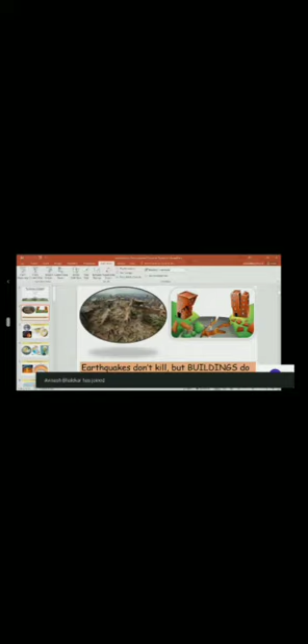Basically, we are earthquake engineers. Earthquake engineering is an offshoot of civil engineering where we deal with loads which are dynamic, which vary with time. As earthquake engineers, our motto, our tagline, is 'earthquakes don't kill, but buildings do.' It's an earthquake that doesn't cause any death, but it's improperly engineered buildings which cause all that devastation. That's the tagline of earthquake engineers.

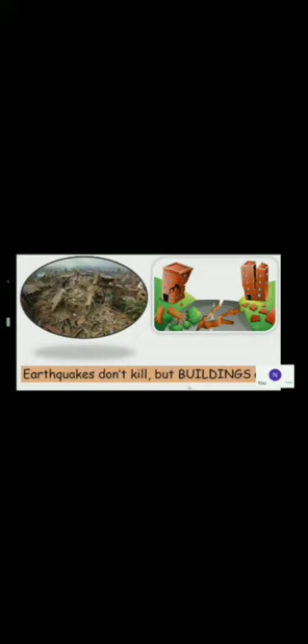Now I want to present some important terminology. We have a subject called seismology. Seismology is a branch of science which deals with the internal structure of the earth, as well as the origin, propagation, and penetration of seismic waves across various strata of the earth. Earthquake engineering comes into play when the seismic waves hit the ground, and we model or design the building so as to limit the devastation caused by the earthquake.

Now let's delve into the structure of the earth. This is the globe, and when we cut open the body of the earth, we find that it is composed of different layers: core, crust, and mantle. The core is further divided into inner core and outer core, and the mantle is divided into lower mantle and upper mantle, as well as the crust. So these are the various strata of the earth.

Why do we have to study all these strata? Because to understand the propagation of seismic waves across various layers of the earth, we have to know what the earth is composed of and what its layers are. The inner core and outer core differ in that the outer core is basically molten, while the mantle and crust are solid forms. That makes a lot of difference in the propagation of seismic waves across the body of the earth.

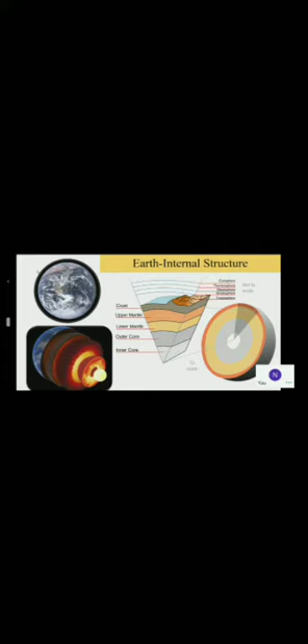So there comes the importance of seismology again, a science that deals with the internal structure of the earth, and the origin and propagation of seismic waves. We have the globe, the earth in its present form, shown at the left corner of the slide. This is the earth in its present form.

But how was the earth the same millions of years ago? No. The origin of earthquakes, or the very existence of earthquakes, is related to the collision, or to the movement of continents between themselves. This theory is summed up as the continental drift theory. Millions of years ago, the entire landmass of earth was accumulated into a mass called Gondwana land.

I'm sorry, I'm getting a request again. Okay.

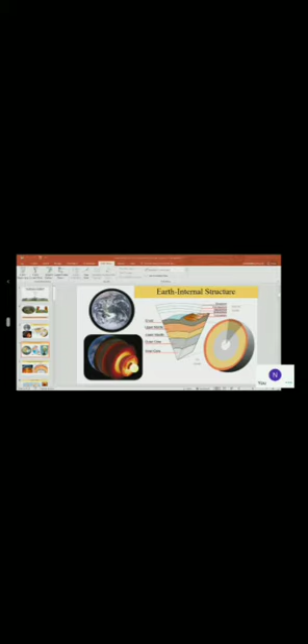Yeah, so the entire landmass of the earth is concentrated into a small mass called Gondwana land.

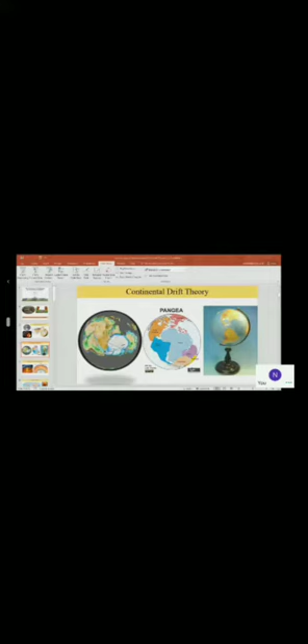The continents of Gondwana land started drifting from each other and formed what is known as Pangaea. Pangaea is a form of the earth that existed 200 million years ago in the late Triassic era. From Gondwana land we have Pangaea, and from Pangaea the continents further drifted apart, giving us the present form of earth shown on the right corner of the slide.

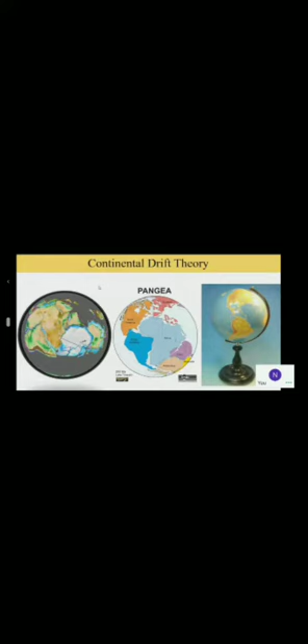Why do these continents drift apart from each other? We have basically three modes of energy transfer: conduction, radiation, and convection. As mentioned, the mantle and outer core of the earth is molten, while the crust and inner core are rigid. Because of this molten nature, convection currents develop in the mantle, and these currents either push the crust apart or pull it apart. So because of that push and pull, the continents move either towards each other or keep moving away from each other. That is the basis of continental drift, and that is why continents keep drifting apart.

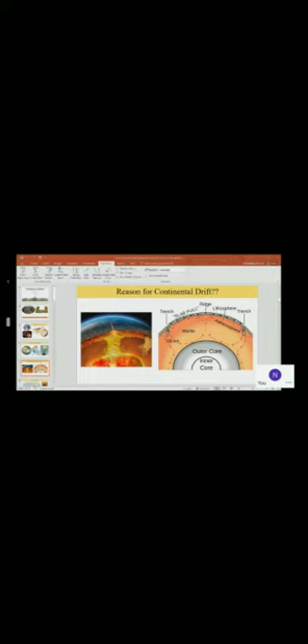On the left is a visualization of how continental drift takes place, and on the right hand side is a schematic representation of the convective current that is formed.

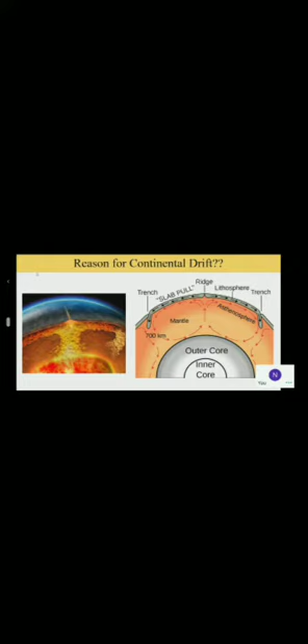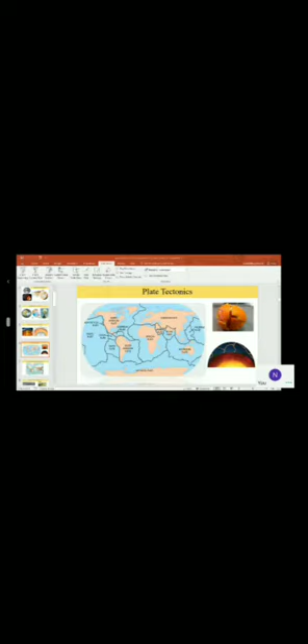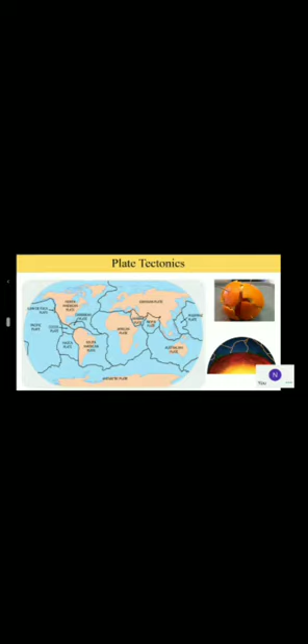The Earth is composed of a lot of fragments, like we see with the orange on the right - the orange peel is separated from the orange mass. Similarly, this crustal mass is called the lithosphere. The crust and the upper mantle are collectively called the lithosphere, which floats on the molten mantle mass. Because of that, we have all these plates: Pacific plate, North American plate, South American plate, Indian plate, and the Eurasian plate. The plate of our concern is the Indian plate because it is subducting, moving under the Eurasian plate. That is the reason for earthquakes basically in India.

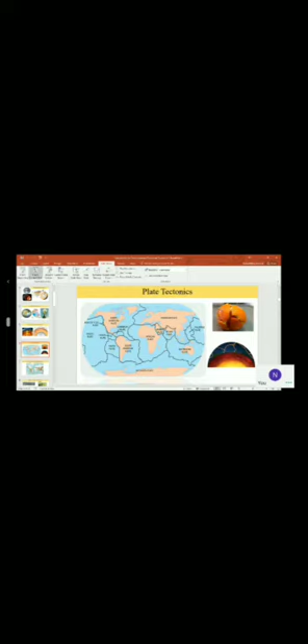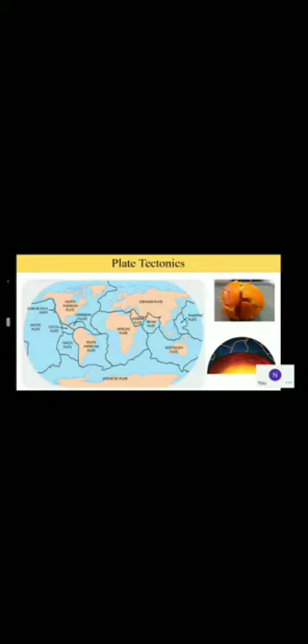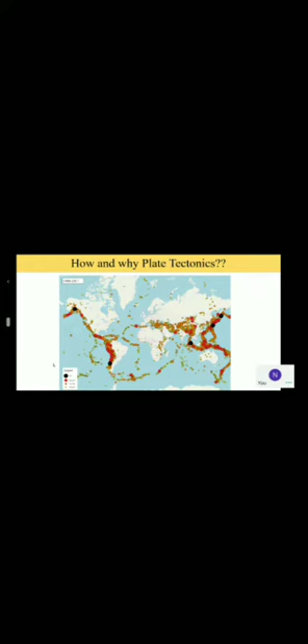Now we have tectonic plates - how do these tectonic plates interact with each other? We have three types of interaction: convergent boundary, divergent boundary, and transform boundary. Convergent boundary is a destructive boundary because the crustal mass is eaten up, and one tectonic plate sinks below the other.

So it destructs some crust. Divergent boundary is where the masses drift apart from each other, and we have a new crustal mass that is formed. That is what is called a divergent boundary. And transform boundary is a boundary where a slip occurs between the plate tectonics.

These may not be important from a civil engineering point of view, but all these interactions and all the waves, seismic waves, and all those seismological parameters are very much required when we design for earthquake resistance, when we incorporate seismic resistance into buildings. So seismology plays a vital role there, and that is why we have to be clear of all these things.

Now, why does earthquake occur? If we define an earthquake as a sudden rupture of Earth's mass beneath the ground, what we see is that over time, the tectonic plates on the Earth accumulate a lot of strain energy.

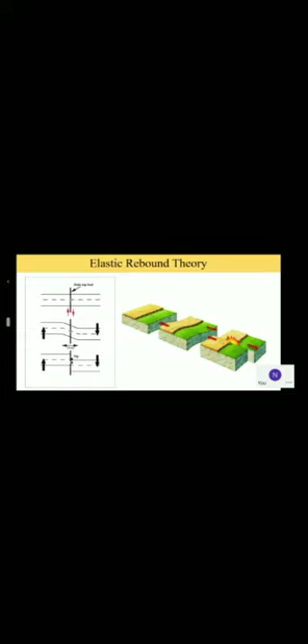We have a fence here, and there are stresses acting on this block, and the fence changes its shape, and because of the pressure, before the movement of plate tectonics, there is a sudden release of energy that occurs, and because of that the energy is released with a very huge magnitude, and we call that earthquakes. You can see a blast here.

So this is how an earthquake occurs, because of elastic... this theory is called elastic rebound theory, where the elastic strain energy stored is released suddenly.

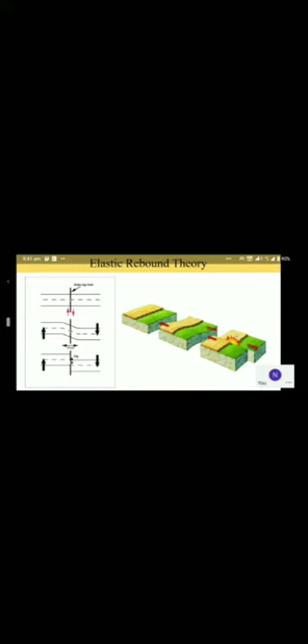Now we'll talk about some terminology of an earthquake. This is the focus. Focus is the point beneath the earth where the rupture basically occurs. You can see in this figure there is a rupture occurring, in between the plate tectonics, or a collision of plate tectonics you can say. That point is called focus.

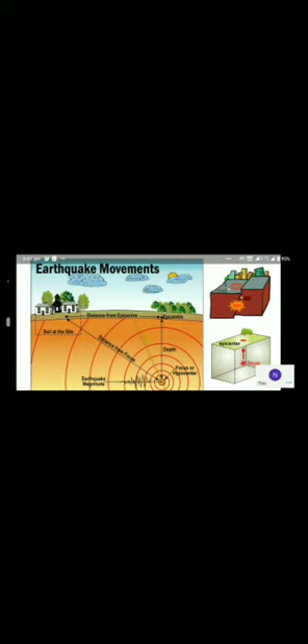And the point exactly above the focus on the ground is what we call the epicenter. So if we follow media reports, we could find that an earthquake of a particular magnitude occurred at the epicenter. So basically, the epicenter is the point where the maximum impact of an earthquake is felt. Any questions still here?

Okay, I guess there are no questions.

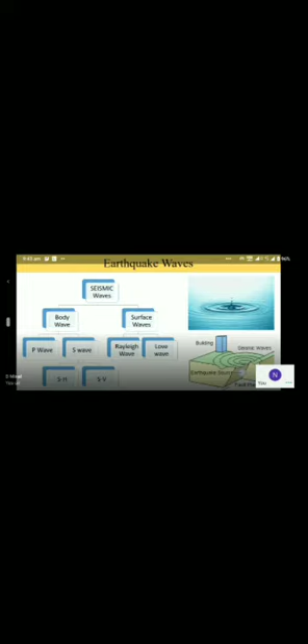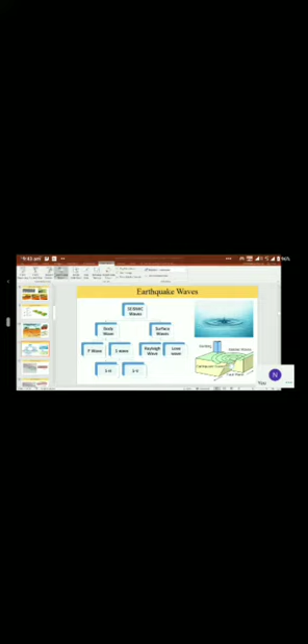So what we have here is a ripple. A stone falls on the surface of water, and there are ripples that are formed, and the stone drops down also, through the body of water. So the waves that develop downwards in the direction of movement of the stone are called body waves, and the ripples seen on the surface of water are called surface waves. That is the basic difference between a body wave and a surface wave.

I guess my slides are not yet visible.

Okay, so this is body wave. Body wave is basically the wave that travels through the body of the earth, through the mass of the earth, and surface waves are produced on the surface of the earth. So we can classify body wave into P wave and S wave, and surface wave we can classify as Rayleigh wave and Love wave.

If you see this figure also, this is the earthquake source, and from source to the top, the waves travel through the body of the earth, and that is why it is called the body wave. And when it reaches the surface, or when it is about to reach the surface, there are waves in the form of ripples that are formed.

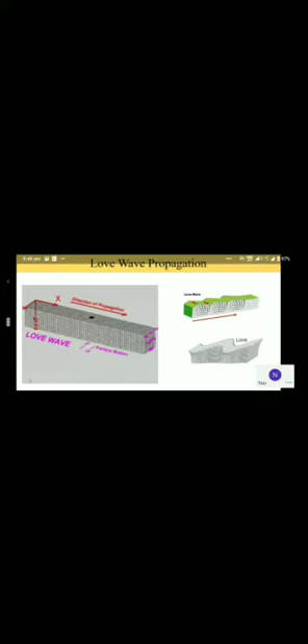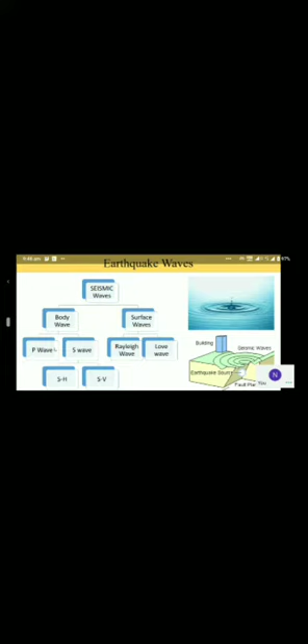We could use this reaction time between the P wave arrival and S wave arrival for giving warnings. Some instruments can record P waves, and whenever the instrument records them, we can sound a warning so people can evacuate to safe places before the S wave actually hits, because S wave is more dangerous than P waves. P waves will not harm us, right?

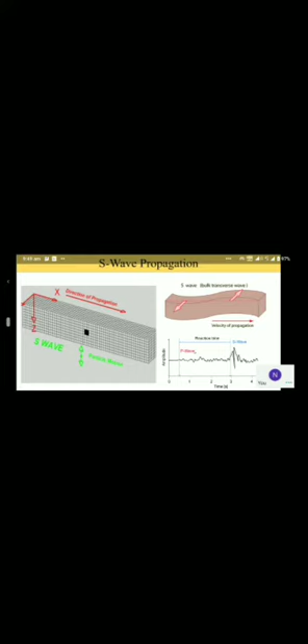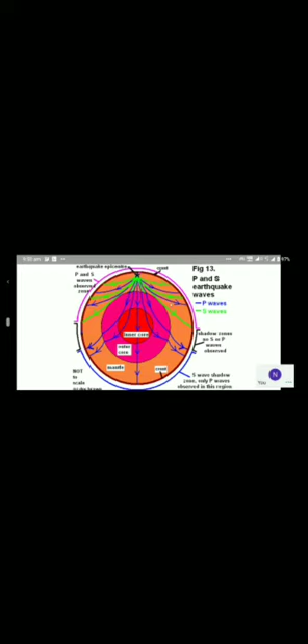Now, coming to how to measure an earthquake: the instrument we use is called the seismograph. A seismograph is an instrument that works on the principle of inertia, as most of us would be familiar with. So the seismograph is an instrument used for measuring an earthquake.

So what we have here is a setup with a very heavy, fixed mass. When an earthquake hits, the bottom plate moves and the entire setup moves, but the heavy mass, because of inertia, stays in its position. Because of this staying in place, it can sketch the signature of an earthquake on paper. This entire instrument is called the seismograph.

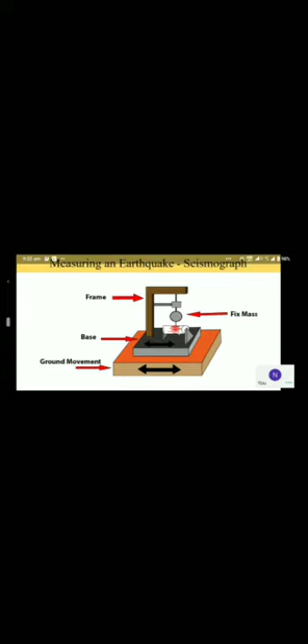Now coming to the seismogram. This paper is the record of the earthquake, and if we unfold it, this seismograph record is called a seismogram - the signature of the earth that we obtain. If we unfurl it, we get this profile, where the amplitude is the maximum displacement the earthquake is causing.

Initially we have a very low amplitude. If you can see, the P wave here has very low amplitude, while the S wave has a much higher amplitude, and it keeps on increasing. So we can see that body waves are less damaging from an amplitude point of view as well.

First, body waves cause only vertical movement, and vertical movements are not as dangerous for buildings because we already consider factor of safety for columns, beams, and slabs for vertical loads. But for horizontal loads, we do not consider the same factor of safety. Surface waves also cause horizontal movement, so surface waves are indeed dangerous. Also, surface waves have a larger amplitude compared to body waves - that is an important point.

So that is about the basics of seismology. Now, I would like to make a point here.

The frequent earthquakes in the Delhi region are being much discussed now. So as seismologists and earthquake engineers, do we really have to be concerned about the recent seismic activity in Delhi? I would say no, because the Delhi region has been experiencing seismic activity for a long time, and none of the recent earthquakes have had a magnitude greater than 4. Earthquakes of magnitude less than 4 occur very frequently and do not cause any real harm. Also, because of the coronavirus lockdown, it is more perceived by people, and that's why people are more scared of it. So regarding Delhi seismicity and North Indian seismicity in 2020, there is nothing to worry about.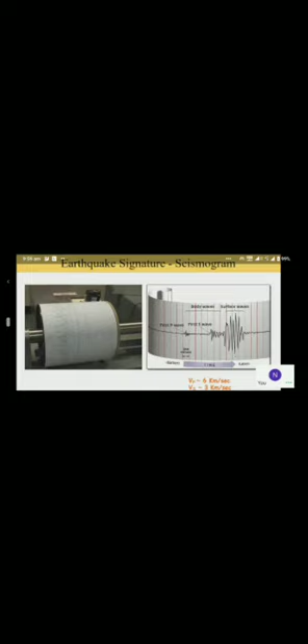Okay, so that is the earthquake signature we have. This earthquake signature is the most relevant link between seismology and earthquake engineering, because the maximum amplitude from this signature is extracted to calculate the earthquake magnitude, which is of very much importance to civil engineers and earthquake engineers.

Now let's slowly shift from seismology to structural dynamics. So we all hit the gym. If we hold the dumbbells in that fashion, the dumbbell is hitting us vertically, and the load is not changing with time, right? That is fixed, so that loading is called static loading.

And when we lift up the dumbbell, or do some exercise with it, we are imparting some dynamic loading into our arms. Because the load is varying with time, anything that varies with time, whether the magnitude, direction, or position of the load, we call it dynamic loading, else we call it static loading.

As civil engineers, we would be more interested in doing a static analysis, until and unless we consider earthquake loading. We design buildings for static loads, not dynamic load. But if we shift from basic civil engineering to earthquake resistant design, we incorporate dynamic loads on the buildings, and dynamic loads could be because of earthquake, wind, tsunami, or other reasons as well.

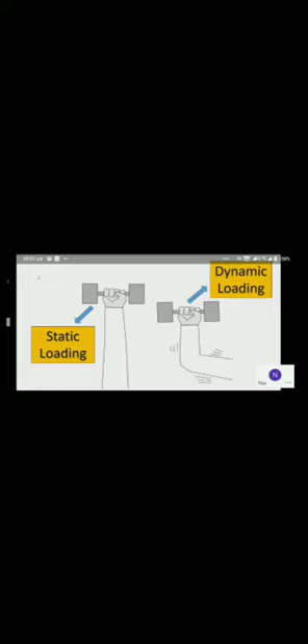So this is the basics of static and dynamic loading. A static load is a load which is not time dependent, meaning it does not vary with time. If we plot force with respect to time, we find that a static load remains constant throughout. When time changes, there is no variation in the load; the load remains constant. So that is mathematically what a static load is.

Coming to dynamic load, it is a load which varies with time. Dynamic loading can be divided into periodic and non-periodic loading. Periodic loading is a type of loading which repeats itself after a fixed time interval, so the load repeats itself over this interval - this is called periodic loading. Non-periodic means there is no fixed period - for example, impact loading like a bomb blast, or earthquake loading, which is also non-periodic.

Now how do we define a dynamic load? Any load whose direction, magnitude, or position vector varies with time - that load becomes a dynamic load.

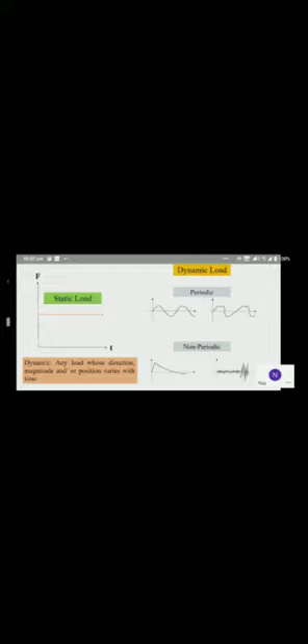Now, I guess a lot of civil engineers here would be interested in degrees of freedom, and they would be very much well aware of that. Well, if we have - I'm sorry, I'm getting another admit request.

Coming to degrees of freedom, how do we define it? Degrees of freedom is basically defined as the number of displacement components to be considered in order to represent the effects of all the significant forces.

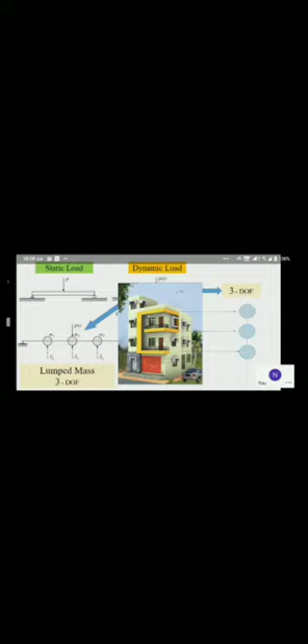To analyze a three-story building seismically, we apply this procedure. If it's a 4-story building, there'll be a 4 degree of freedom system. If it's a 5-story building, there'll be 5 degree of freedom system, and so on. But infinite degrees of freedom is not acceptable, so we similarly lump masses and convert into a 3 degree of freedom system.

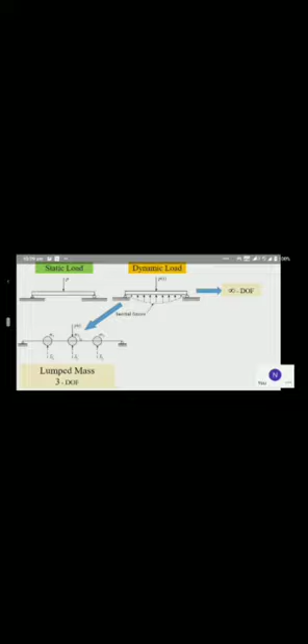Now, everybody of us would be aware of what an inertia is. I'm sorry, I got an admit request again. Okay, okay.

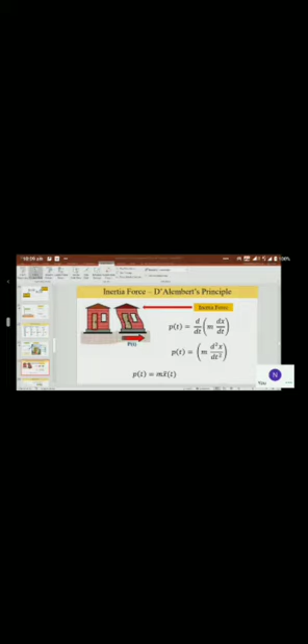Inertia is the tendency of a body to remain in a state of rest or of uniform motion. So when a building is subjected to earthquake loading, the building tends to remain in its equilibrium position as before because of its inertia. You can see that the top of the building sways left while the bottom of the building has to move right because of the earthquake loading.

What the principle of inertia teaches us, and the D'Alembert principle says, is that the time dependent external load is equal to the rate of change of momentum. The external load acts from left to right, and this inertial load acts in the opposite direction, so these are equal in magnitude. D'Alembert's principle says that the magnitude of the time varying force is equal to the rate of change of momentum.

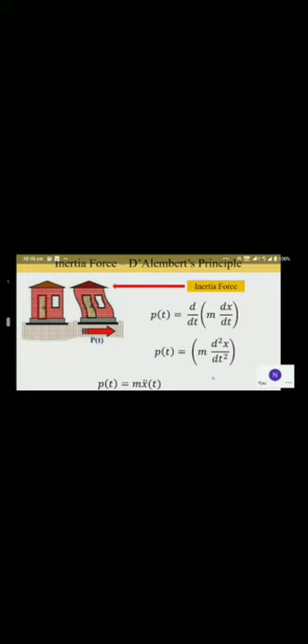If we simplify this, we find that the external loading is equal to mass times the acceleration. Acceleration is again time dependent, so it is mass times the acceleration of the body. This is called the inertial force. This equation is of importance when we are solving dynamic problems. So this is the inertia force.

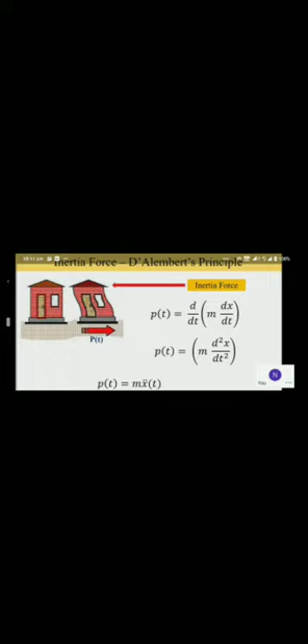Now, damping force. Damping is basically a loss of energy. Like we run bikes, we drive cars, so all those have dampers attached. Bikes have shock absorbers, trucks have leaf springs, and cars have suspensions. The effect of all those is to generate a loss of energy and help reduce the vibrations, so we can travel in a safe mode. That is the significance of damping.

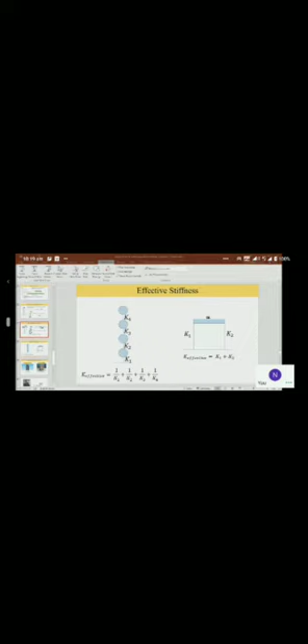Yes, Vijay Kumar sir, hello sir. Sir, in the damping force graph, you showed an initial amplitude, but the structure initially is at rest. How did you get that initial amplitude? Which one, sir? Just a second.

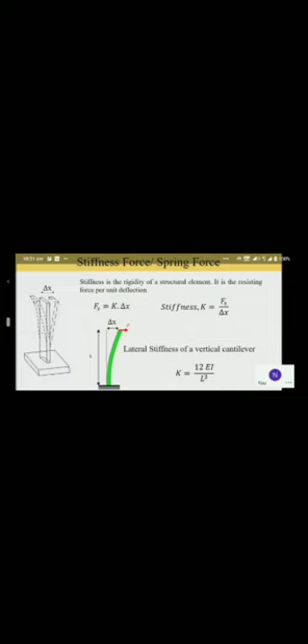So at 4 seconds, say the amplitude is this much. At 5 seconds the amplitude has decreased, and at 6 seconds the amplitude is going on decreasing. Even at time 0, there could be an initial amplitude, because amplitude means you're moving. For example, you take this vertical cantilever and pull it towards your left, incorporating a strain, delta x strain. Because of this, there is a predefined amplitude. So after that, because of this damper, the amplitude keeps on decreasing.

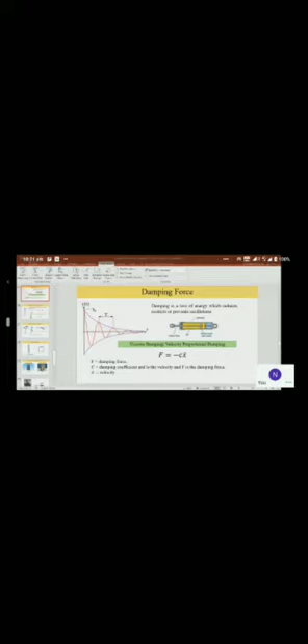So we have all these forces: inertia force, damping force, stiffness force, and we derived the basic dynamic equation for free and forced vibrations as well. Now, here's a question to the audience.

Now we have a 20-story building and a 4-story building. On my left side is a building of 20 stories, and on my right side is a building of only 4 stories. Say a hypothetical earthquake occurs affecting both the 20-story building and the 4-story building. So which building would shake more, the 20-story building or the 4-story building? That's an open question to the audience.

So according to the audience, which building is expected to shake more? Can anybody comment, or put in the chat, the 20-story or the 4-story building? Yes, Vijay Kumar says 4-story, Bharti Misal says 4-story. Okay, so basically, according to them, 4-story buildings shake more.

What do you mean? Okay, so Vijay Kumar and Bharti say 4-story buildings shake more during an earthquake. What we see here is that it's not that deterministic. We cannot say for sure that a 4-story building shakes more or a 20-story building shakes more, because every building has its own time period.

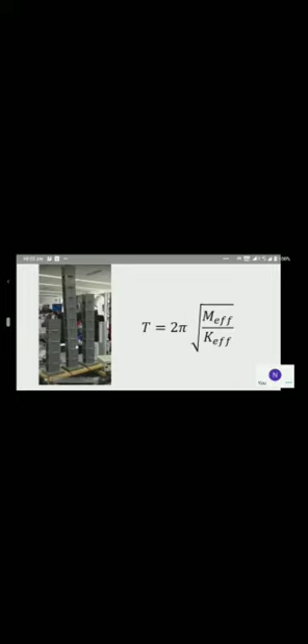A tall building is supposed to face more damage, but that is not the case, because the damage is basically caused by resonance, and that depends on the natural time period of the building. If the natural time period of the building matches with the time period of the earthquake, then there is a resonance condition, and there will be maximum shaking.

So this is an equation for the time period: 2 pi root of mass effective by stiffness effective. If I play this video, we can just observe the central building and the other two building frames.

So yeah, the earthquake... I guess there is some glitch. Okay, I guess somebody else is presenting. Okay, yeah, right.

Now just observe the central building and the buildings surrounding that. If I play this video, we see that now the tall building is shaking more.

Now just observe the tall building. The tall building is shaking more now, initially, because the time period of the tall building is high. So initially we are shaking the ground only slowly, meaning a higher time period. That higher time period matches with the resonating time period, or natural time period, of this tall building, and that is why the tall building is moving vigorously initially.

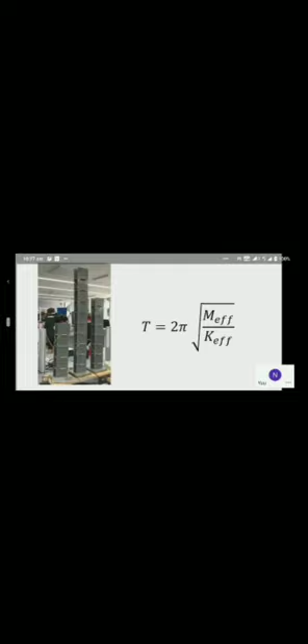So, I'll play that again. The taller building is moving vigorously, but the shorter buildings are not. But when I increase the frequency of ground vibration, that frequency matches with the frequency of the short buildings, and the short buildings start vibrating vigorously compared to the tall building.

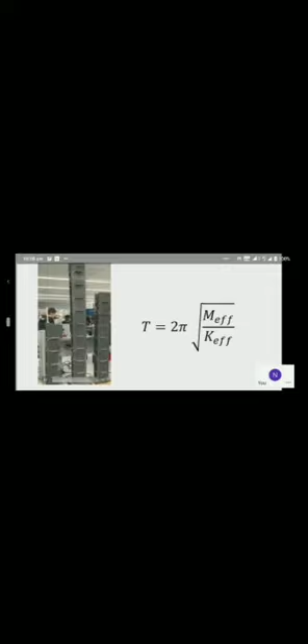So coming to the answer to the question, let me admit somebody. Now, which building would shake more? The answer is the earthquake has to decide which building it has to shake more, either the 20-story building or the 4-story building. Everything is a play of the natural frequencies and natural time period.

So in the 1960 Chile earthquake, what happened was all those buildings with 21 stories got damaged. All other buildings were not damaged. That is because the natural time period of the building matched with the time period, or frequency, of the earthquake.

So only the 21-story buildings were in resonance, other buildings were not in resonance, and only the 21-story buildings were damaged in the 1960 Chile earthquake. That was the thing. This is the equation for the time period of a building: 2 pi root of mass effective by K effective.

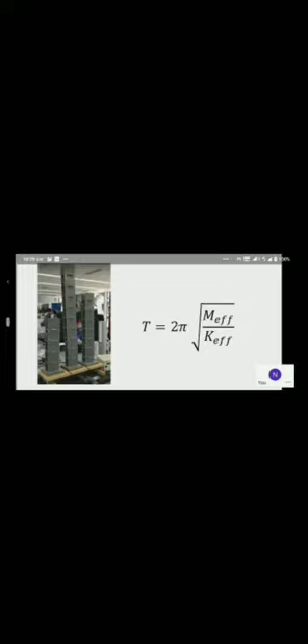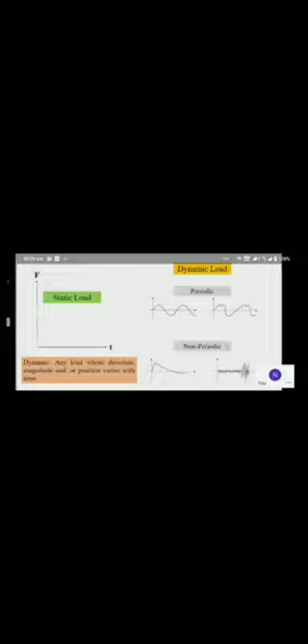Now if you calculate, we get the time period of the building as 0.45 seconds. So this would be around a 4-story building or something similar, since the entire mass is lumped here.

So how do we calculate the time period? We use this formula: 2 pi root of m effective by K effective. We get 0.45 seconds here.

Now, what is of paramount importance to earthquake engineers is the estimation of base shear. Base shear is the maximum expected lateral force the building is subjected to during an earthquake event - the maximum horizontal force. For example, all those individual stories from first story till 10th story are subjected to seismic loads, and that is increasing. The highest story will have the highest seismic loading, or expected lateral force.

If we take a sum of all these lateral forces, we get something called base shear. Base shear is the sum of all these lateral forces. Now, once we get the time period of the building, we can calculate the total base shear. I'll show you how.

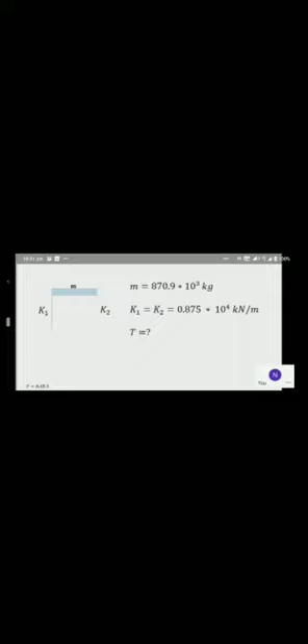After we get the total base shear of a building, we have to distribute it into various individual members. So F1, part of the entire base shear, has to be transferred to this member, this member, and this member. The horizontal loading is now incorporated, and we can design our members for these horizontal loads, using equations available in IS codes, maybe 1893.

Now, this is the building we have taken, with a time period of 0.45 seconds. This building is located at Pune, and it's a special moment resisting frame, a residential building. Now we have to calculate the base shear.

Now we see that the time period of this building is 0.45 seconds, and it's located at Pune. I'm sorry, I did not add the seismic zoning map - let me talk about Pune a bit. India is basically zoned into 5 seismic zones.

Zone 1, zone 2, zone 3 - actually India is now zoned into 4 seismic zones: zone 2, zone 3, zone 4, and zone 5. Earlier there were 5 zones, and zone 1 was considered least earthquake prone, but there were some earthquakes in zone 1 as well. So in the later modification of IS 1893, zone 1 was merged with zone 2. Now we have zone 2, zone 3, zone 4, and zone 5.

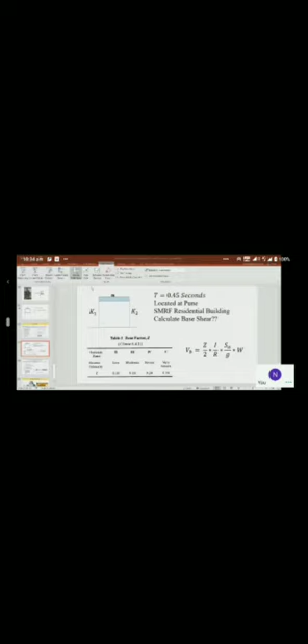So for Pune, we have Z as 0.24. So to calculate for this building in Pune, we use Z as 0.24. Now, I is the importance factor.

Now again, if you go for this one, IS code, coming to the importance factor, table number 6, we have: if it's a hospital building, school building, or a public building, we have an importance factor of 1.5. But this being a residential building, the importance factor for this building is only 1.0.

Now coming to the response reduction factor. I have mentioned that this is a special moment resisting frame. What is a special moment resisting frame? It is a frame which is developed by adopting all ductile detailing provisions as per IS code 13920. If we do all those ductile detailing for that building's members, then we call that building a special moment resisting frame.

So for an SMRF building, if we take IS code table number 7, we find that for a special moment resisting frame, we can take a response reduction factor R of 5.0.

So in this equation, Z we put as 0.24 because this is in Pune, zone 4, and importance factor of 1 because this is a residential building, and R is the response reduction factor, we take it as 5. And SA by G is something we get from a chart.

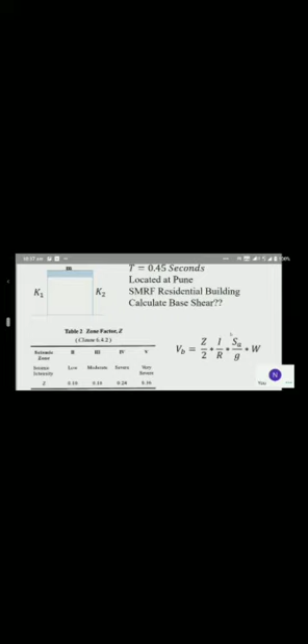Now if I take the SA by G value from the chart, I get it as 2.5. Coming to the entire equation, up to SA by G, this base shear equation is dimensionless. We multiply this dimensionless equation with the seismic weight here. Now Z by 2, into I by R, into SA by G, into the seismic weight. So we get the base shear for this building as 5.327 kilonewton.

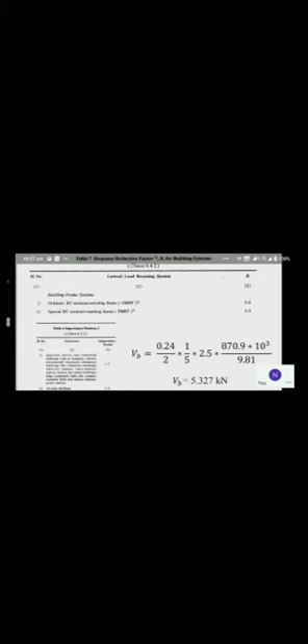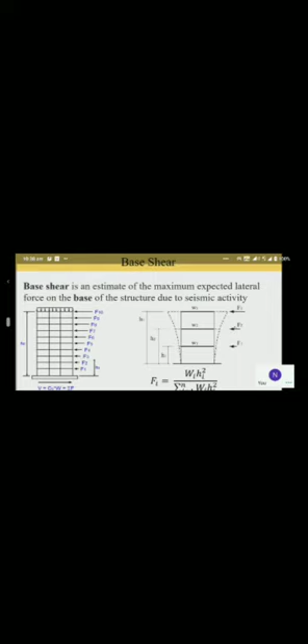Now this base shear of 5.327 kilonewton is the total base shear that we have, and that can be distributed to individual members. So Fi is this into this, multiplied by base shear Vb. So if you do that, we can get the individual horizontal forces that this system is subjected to.

Right, talking about this was a numerical part. Now how to control damping. So I would present a few methods which have been used globally to control the vibration.

So first is tuned mass damper. This is a damper, a heavy mass that is hung from the top of a building and allowed to move. This mass is tuned according to the frequency that the building could be subjected to.

So what happens is, when an earthquake hits, this mass goes into resonance with the frequency. The frequency of this pendulum mass goes almost into resonance with the frequency of the ground earthquake, and it takes up all the vibrations, and the building does not vibrate. It's the mass that vibrates inside, but the building does not vibrate.

This is a schematic view of a tuned mass damper in Taipei 101 tower, and this is the inner view of this damper. So using a tuned mass damper, we can achieve some damping in the building, and we can safeguard the building.

Another is base isolation. So if we have this foundation, this is a rigid foundation, and the building is resting on that, whenever an earthquake strikes, this building moves to and fro. And there is an interstory drift.

The drift at this story is not the same as the drift of this story, is not the same as the drift of this story. So the drift changes between stories, and there is a relative difference in the interstory drifts here. And because of that, there are some shear forces that are developing at various joints and various members of the building.

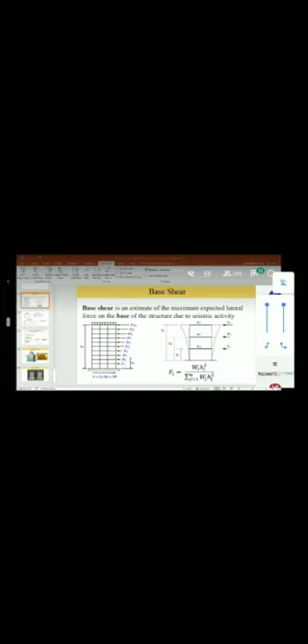Vulnerability is how we take steps to tackle those buildings. For example, if I have my residential building, I need not invest crores and crores to make it 100% earthquake resistant. I can entertain some sorts of cracking in the building, but I will make sure it does not fall on me or collapse on me. That is how we achieve economy.

But if it's a hospital building, I have to take more parameters to make it more and more earthquake resistant. It should not shake much, because a surgeon performing surgery inside should also not be disturbed. So we have to invest more economy into that. Basically we are reducing the vulnerability, and that is the main aim to be considered in reducing earthquake damage.

Risk is hazard times vulnerability times exposure. Exposure is the underlying conditions there. We don't have any hold on hazard and exposure. We can only control the vulnerability.

So how about all those existing buildings? We can strengthen those buildings, that is called seismic retrofitting, so they can actually survive better in earthquakes. So all those points have to be taken into consideration.

For a country like India, we have to go for severe earthquake planning, earthquake resistant design for buildings, and that would be the need of the hour. Countries like Japan have come out with buildings like Sky Tree, which guarantee 100% seismic resistance.